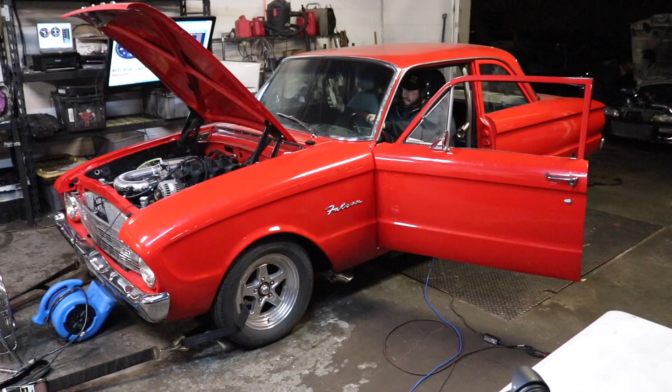So to restart for anybody who's new, this is a 5.3. It is a Gen 3 motor, I believe. So it's got a stock, untouched bottom end - we have no clue how many miles are on this motor. Pistons, rods, all stock, didn't touch them, didn't regap them, none of that stuff.

But what we did do was we took the heads off, got LS9 gaskets, decked the heads, of course. So it's got LS9 gaskets, it's got the cheap Chinese ARP head studs. I don't remember exactly what they're called, but they're nice studs, just not the ARPs. I think they're like 120 bucks, not super Chinese, just a different company that makes them.

But we got those head studs, the LS9 gaskets, and we have some PAC 1218 springs, I believe, so they're just a little bit stiffer than OEM. Other than that, stock push rod, stock cam.

This thing also does have a Vortech charger on it. It is a V3, so it's an older unit - they don't even make them anymore. I think it's rated to run like 10 pounds of boost, and we have it right about 11. So I do know that we are overspinning it just a little bit, but it's okay. I'm not really too worried about it because it's so old, and this build was put together so long ago that basically it's been outdated.

So if it does break, we'll do something or upgrade it or whatever. It does have a smaller pulley up top, so it's about as much boost as we're gonna get out of it. It's got a little water to air setup on it, so it doesn't have an air to air. The intake air temps do still get a little bit hot, but not too bad.

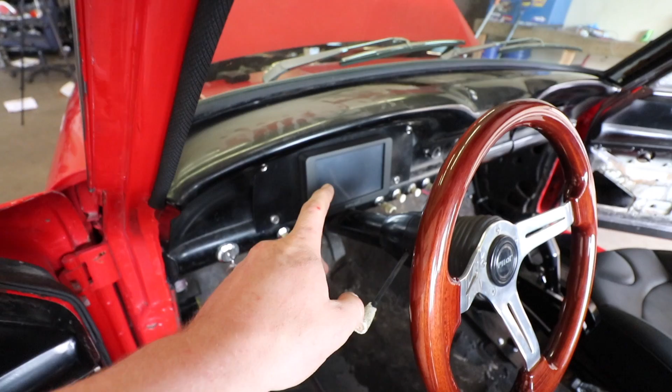Like I said, it was super simple, so all I did was plug it in. This dash has two extra USB cables on the back side of it that are open, so I just slid it into there and tied the cables up. Now I'm going to turn the key on, mess with the dash, and see if I can put the sensor onto the dash, or it may just show up by itself.

I'm not too sure. So I was going to go to the gas station and get some E85, but if you guys watched my previous videos, there was an issue with the Falcon doing weird things—not priming, and then once you get it started it would just rev out of control and do all kinds of weird stuff. We thought there was something weird with the relay in the back connected to the pump that was back feeding into the ECU.

But today I've figured out that wasn't actually my issue. I thought it was just the relay sticking, but it's not. Because right now, I'll show you guys—it might prime right away, or it might not. So, turn the key on... fuel pump primed, and it primed pretty quick compared to what it normally does.

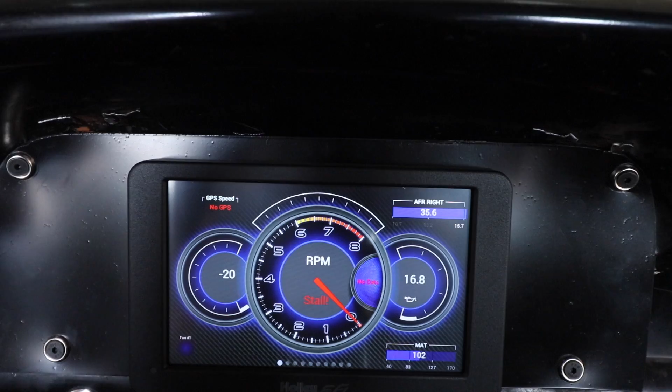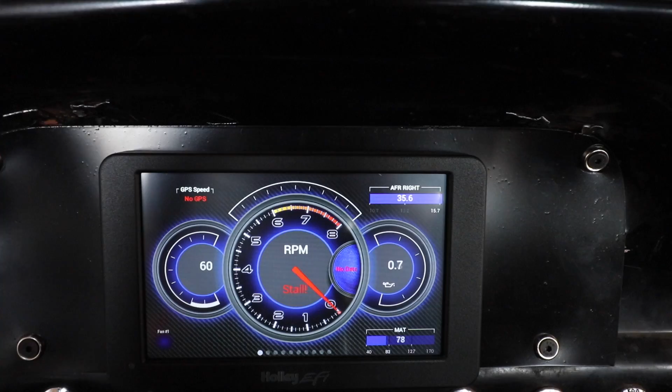Let me show you guys what this is doing right now. You can watch these sensors over here wig out. This one is the engine coolant temp sensor, that one's the oil pressure, and this one down here is the intake air temp sensor. It's wigging out all crazy, like there's something shorting out or something weird.

So we've been fighting this issue—it's intermittent, I have no clue what it is. One thing I always hate doing is blaming the ECU or blaming the tune. Just to double check it wasn't the ECU, I grabbed my Holley HP out of my RX-7 since it's just chilling in there. It shouldn't matter, but what I did was unplug the old ECU and plug mine in just to prime it. I'll show you guys, but what happens is none of the gauges freak out, there's no wigging out. That leads me to believe it's not a wiring issue or a sensor issue—it's definitely something ECU related.

So I called Holley up. The dude I talked to, I believe his name was Ron.

The first thing Ron said to do was redo the firmware on that ECU. He said the firmware could be corrupt and cause it to do weird things. So I'm gonna bring this ECU with me. Carlos is on his way up here with the truck and trailer, and we're already on our way to the dyno. Good thing this happened before we got to the dyno, because otherwise I wouldn't have had my HP.

So today we can still tune the Falcon. Basically what we're gonna do is take the old tune off this ECU, which Ron said would be okay, the tune wouldn't be corrupt. We're gonna load it on this ECU, and he's gonna go on the dyno and make all the changes with my ECU. Once we get this ECU fixed, hopefully it's just a firmware issue, or they said they'd replace it for us, then we'll load the tune off my ECU and put it back on theirs. So that way it's all good. We are gonna still get to tune the Falcon tonight.

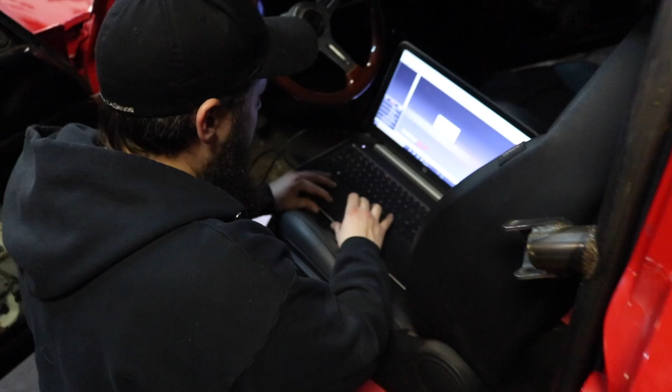All right, so we're over here at the dyno, and Derek has already took the tune off the old ECU that was in the Falcon, and he's already plugged my ECU into it, and he's uploading the tune right now, I'm pretty sure. So we're gonna try updating.

I think we actually have to upgrade your firmware before we can even use it. Oh, so sick, we might as well upgrade the other one. Which one do you want to upgrade? I mean, it's gonna take 25 minutes. Oh shit. Or mine, because we don't know if that ECU is actually bad. Exactly, we could go. So we know my ECU is good. Still not be able to do it. Well, we know yours is good, like you're saying.

So, yeah, hey, you guys excited? I'm just hungry, bro. Dude, I know, everybody was all hangry. You don't look that excited. Oh yeah, oh yeah.

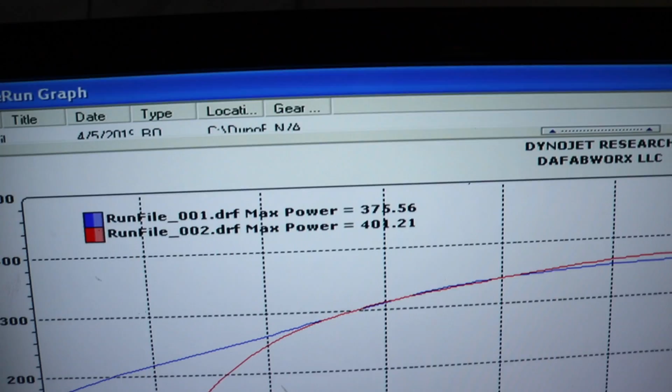Made exactly 401, like I said, I felt like it was about 400 horsepower. So that pull, it made 401 horsepower and 386 foot-pounds of torque.

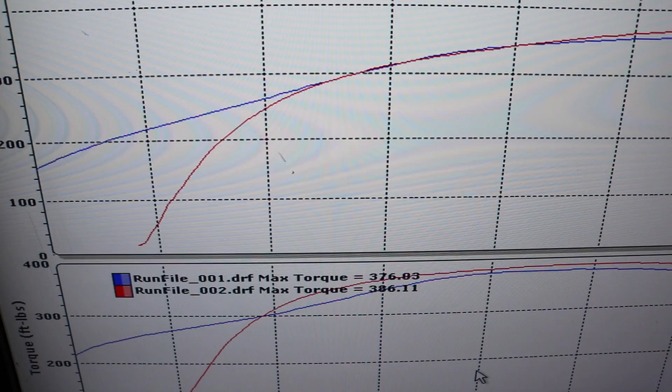Derek said he added 2 degrees of timing. I highly doubt he's gonna go any more. But I think we're gonna get it hot, the intake air temps hot, and then see how it acts when the intake air temps are hot. I'm gonna laugh if he trolls me. Honestly, wouldn't be surprised if he trolls me again.

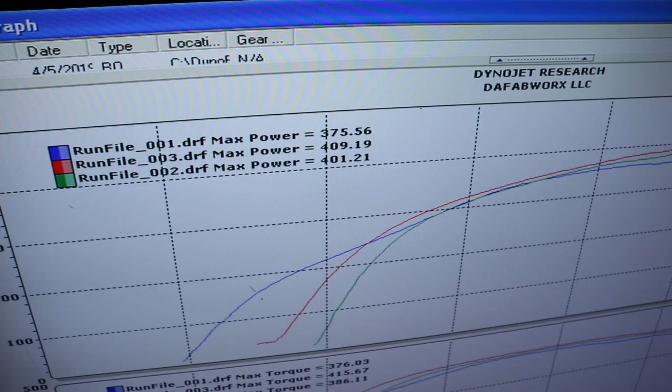Hardly made any more power. Made 415 foot-pounds of torque though. 409 horsepower. Oh yeah. All right, so what did you just do? You added some timing to it?

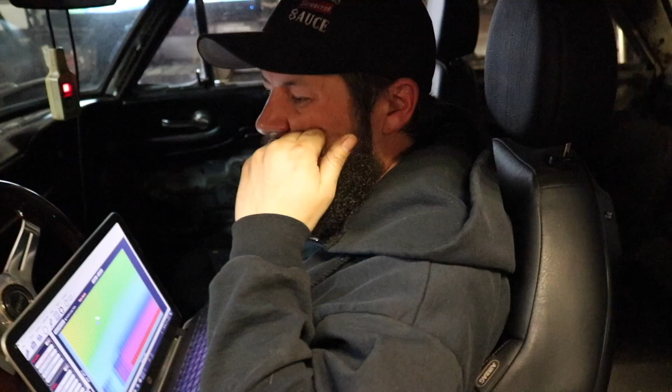Yeah, so we added 2 degrees to it. Picked up about 9 horsepower. We probably could keep going for a couple of degrees more, and it would keep making decent gains, but nothing really crazy with the gains.

So what we're probably going to do, because we don't know the condition of this motor - this is kind of how we treat junkyard motors, we want to be very gentle with them - is just leave the timing where we're at, knowing that we're plenty inside the safe zone timing range.

So later on, if we wanted to, we know we could throw a couple more degrees at it if we needed just a little bit more power. But we're talking like 10 horsepower maybe. Yeah, which I'd rather be in that cushion zone. Yeah, exactly, and that's what I'm thinking too. For what we want to do with this car, we're not trying to make like 15 horsepower for what? There's no point, I mean, it's probably something we wouldn't even really feel.

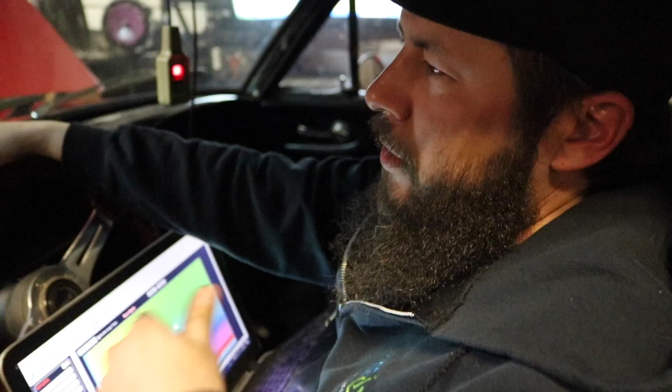So we don't want to be on the threshold all the time. We want to be able to just take it out, whoever's driving the car, and beat the shit out of it. Not have to worry about blowing it up. And it's a high miles motor, we don't even know the miles, it could have 350K on it. We have no clue what abuse this motor has been through. So we're just gonna play it somewhat safe.

I mean, you did add some timing to it, so I feel like it's right in that sweet spot where it's making some power but not too aggressive. Yeah, we did, it's a decent amount of timing, and these are the numbers in best case scenario. Intake air temps are about 109 degrees when we start the pull. On a super hot day, maybe they're a little higher. So in this table, it's going to pull timing if intake air temps are pretty high. This is the best it's going to feel. If it's super hot out and getting really bad IATs, it may feel a little less. And that's where I want it to be, I don't want to be on the freaking threshold. Exactly, because then it leaves us no wiggle room. If we don't pull enough timing in the intake air temp compensation, we could hurt something. So I'd rather be safe than sorry.

And then you said you're just going to do a 3rd gear pull to make sure it's all good? Yeah, same exact settings, but we'll do a 3rd gear pull and see. Well, and if I get an intake on it, the intake air temps might stay nice and cool while we're cruising it around. That would be nice. So yeah, sick, Mr. Derek over here doing his magic.

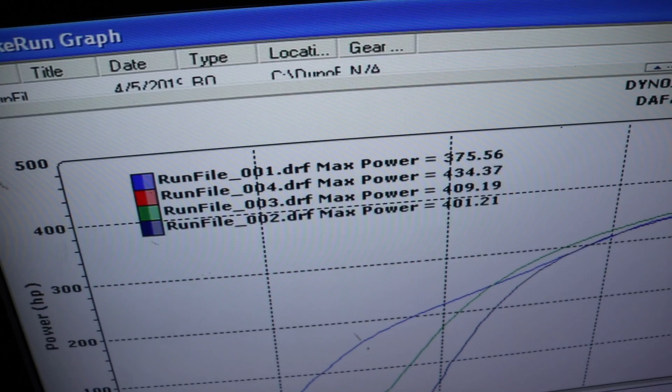And it probably made a little less than 400 foot-pounds. So it's the next day after the dyno. I didn't film anything at the end because we were watching this 240 try and get tuned, and he had fuel pump issues, but it was really late. But Carlos was really happy with the Falcon. So yeah, I guess that's all we can really hope for with the Falcon, have them be happy with it and how much power it made.

So like I said in the beginning of the video, I gave you guys a rundown on the setup. We weren't planning on it making a lot of horsepower, so what it did was about what it felt like. Really safe tune, should be able to beat the crap out of that thing and have no issues with it ever. Just gonna have to wire up the trans brake and set up the rear end a little different, because the pinion angle is really high. So it's just a couple little things left to do, but it's ready right now to have fun for the rest of the summer. Oh yeah, so you can go right now, take it out to the track, have some fun with it. Will it be optimal? No, not yet, but it'll be a lot of fun, and at least be a car that they can go out and beat the crap out of and not have to worry about.